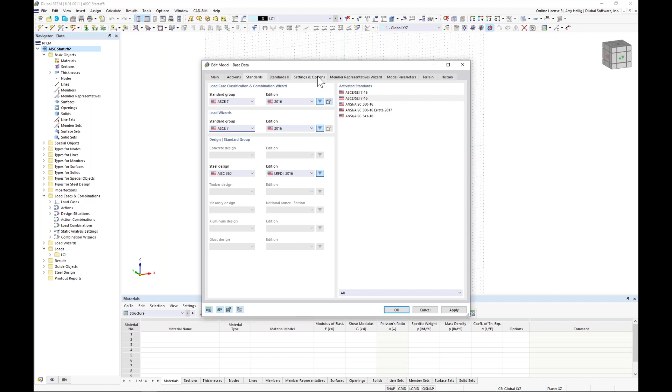Under the settings and options, this is where we can orient our global and local axes. Both are set to upward. I've also activated the member representative here, which gives us the ability to group together members with common materials, cross sections, and maybe member lengths. This will come into play a little later on.

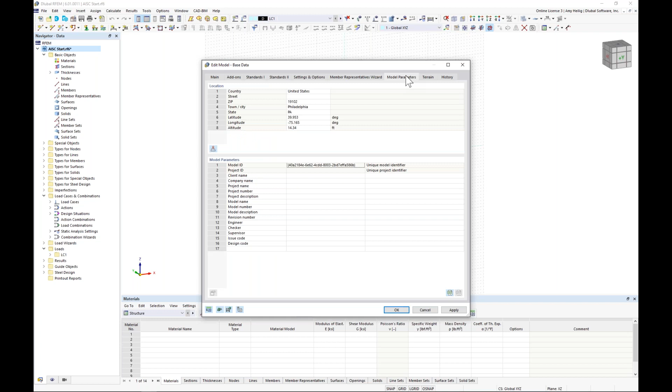Finally, we have this model parameters section, which gives us the ability to integrate with our GeoZone tool available on our website. For those not familiar with the GeoZone tool, we have integrated various standards, including the ASCE 7, the NBC standard, and many other international standards, for snow, wind, seismic, and tornado loads.

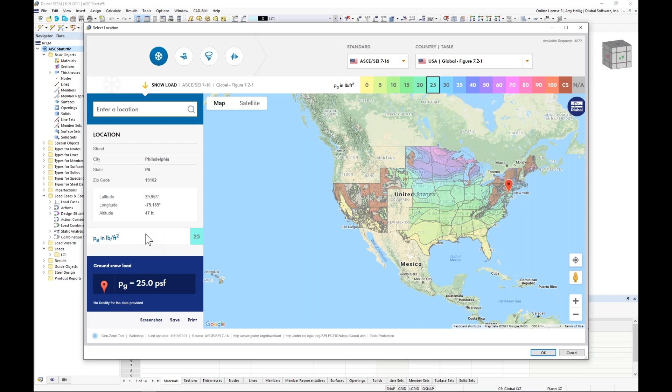This is further integrated with Google Maps technology, so we can simply type in our project address. I typed in Philadelphia, PA, and I have my ground snow load automatically given to me based on the maps provided within the ASCE 7. This will be used a bit later on for our automatic snow load generator.

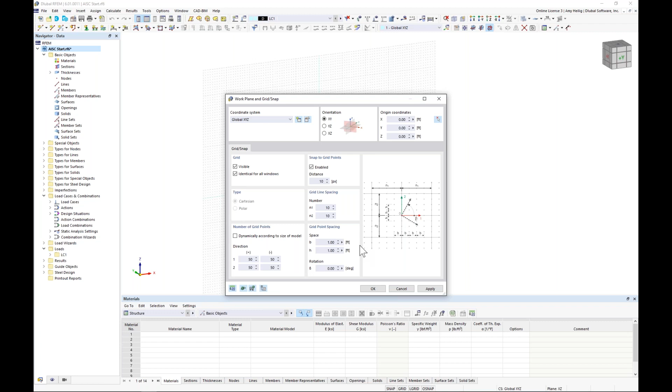Once we have set all of this input, we can click OK to be brought into our model. Within the graphical interface, I have my drawing grid activated. Down here at the bottom, I can right click to edit this drawing grid. The grid point spacing is set at every 1 foot. If we see anything other than this, we can always click here to set the default back to the 1 foot spacing.

We'll begin by drawing our first member. We'll go up to our toolbar to draw a new single member. The member type will be set to beam. The section will be defined here within my cross-section library, so I can activate my standard steel sections, and we'll use our filters on the left to filter to the United States, the AISC 15.

The W sections are now available to us here, where we can scroll down and choose a W14 by 48. Once I have my cross section selected, I need to create a new material.

In a similar manner, I'll open up my material database. I can again use my filters on the left to choose the United States, the AISC 360, and we'll see here steel A992 available to us that we can click OK.

Now this material is available for all members within the model. I don't need to redefine that material each time. I can just select it here within this drop-down box.

Once I click OK, I'm going to go back to this main tab and deactivate the design properties. This is specific to steel design according to the add-on we previously activated. We'll get back to this later on, but for now I want to deactivate this option.

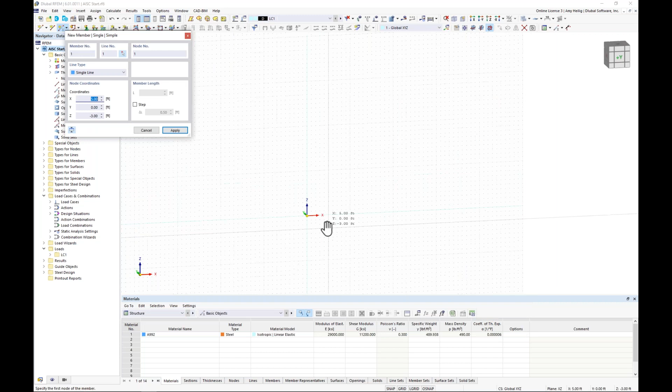We'll begin with our first column by snapping at the origin here and a point 14 feet in the global Z direction. My second point is going to be located at x equals 40 feet, and then we're going to choose again that same point of 14 feet in the Z direction.

Now I'd like to create a node that's right at the center of these two nodes at the tops of my columns. For this, we have a nice feature within our drop-down box that lets us create a node between two adjacent nodes.

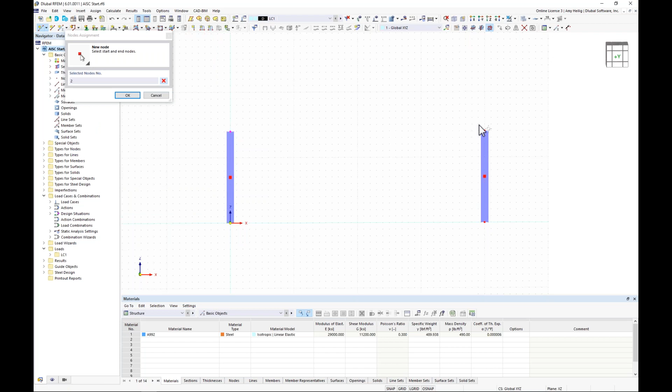What we can do is graphically select the nodes at the tops of my columns, and when I click apply, you'll notice we get a third node generated here. This node is really dependent on these two nodes that we've selected graphically.

I can even take this column and move it around and you'll notice that node moves with it. We can also take this node, double click on it, and you'll notice the node type is set between two nodes. If we want to edit it, we can simply change this back to standard and I can modify my Z coordinates to 16 feet in the vertical direction.

We're now ready to generate our beams for our first moment frame. I'm going to go to draw a new member once again and deactivate the design properties.

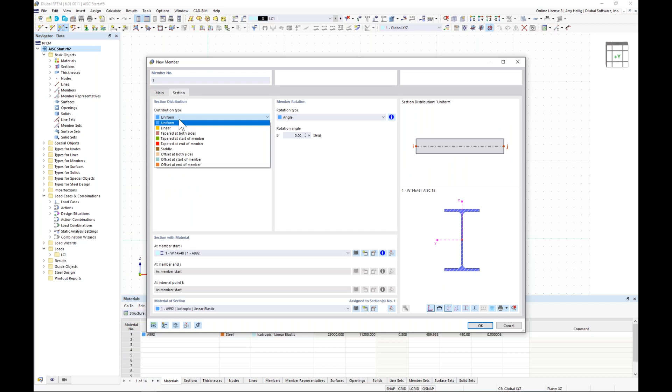Under the section, I'm going to choose, under distribution type, tapered at the start of the member. Previously in RFEM 5, if we had any type of taper, we had to completely create a new member segment. But in RFEM 6, we have the ability to integrate this taper directly within this single member element.

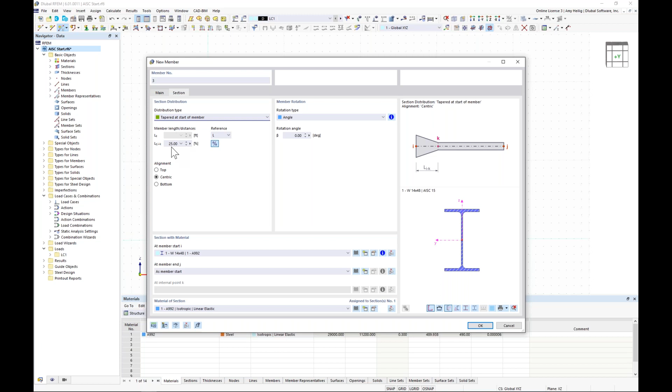We can set the member taper length, and this is set at 25% by default. We can additionally set the alignment. If I set this to top, notice that the top of member is completely flush here.

We do need to create a new cross section. For my member end, I'm going to go back to my W sections and scroll down here to a W12 by 26. Remember, I don't need to define the A992 material again—it's already available to me here, and I click OK.

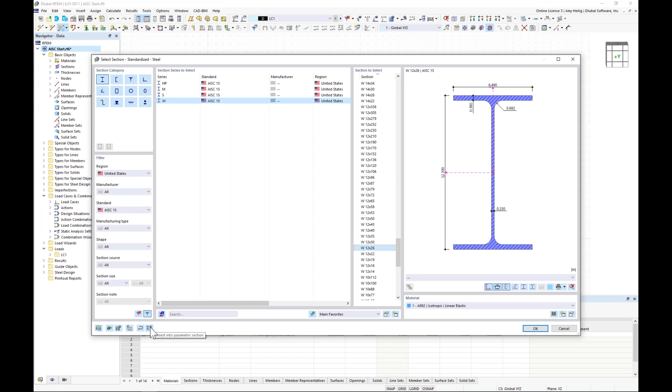I also need to create an additional cross section for my taper start. So I go back to my cross section library and choose again that same W12 by 26, but we have a feature over in the left corner where I can convert this into a parametric section. When I click this option, it imports all of the cross-section properties from that W12 by 26, but I have the ability to modify any of the properties, such as the depth to 24 inches.

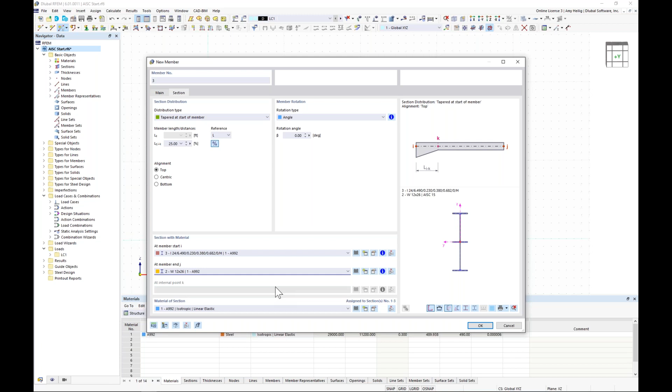I click OK, and once we click OK through this additional dialog box, we can set that parametric section as the member start. At the member end, I want to choose that W12 by 26 I previously defined. When I click OK, I will start at the top of my column, and my second point will be up to that center point. I do the same thing on the right-hand side, and now we can see those beams generated with the taper available to us here.

These color codings are the member representatives. I'm going to turn those off for now—we'll get into them a little bit later. I'm going to highlight all of my member elements here.

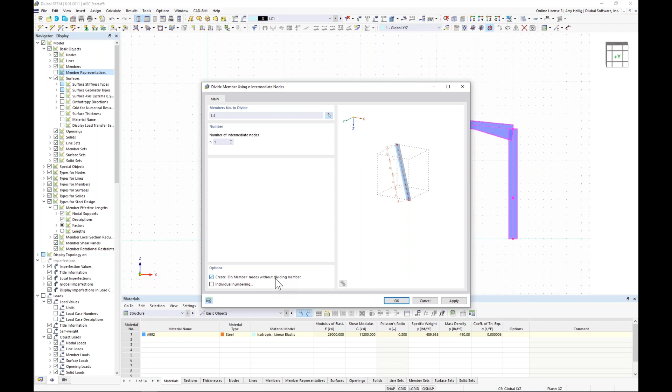I'll right click, and under the members option, I have the ability to divide the member by a set number of intermediate nodes. I'm going to create one intermediate node, and choose the option to create the node along the member without actually dividing it, so that node will be integrated as part of the member element itself.

I click OK, and if we turn this into wireframe view, we can see these nodes in a different color, blue here, generated at the midpoint of each element. I'm going to highlight all of my elements here, including those new nodes, but hold down my shift key to deselect the nodes that define where the taper start should begin.

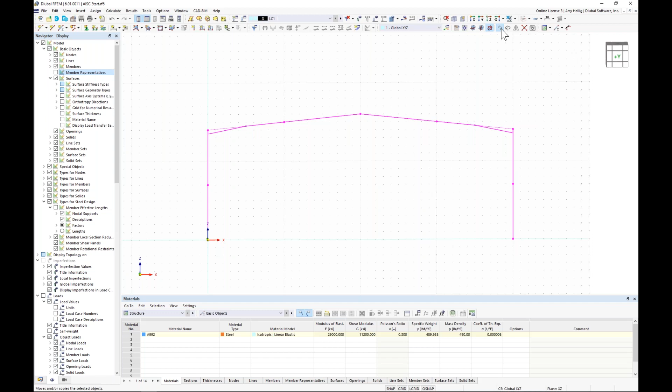I'm going to utilize my move copy tool and create a copy. We'll create 3 total copies in the global Y direction of 16 feet. Under the numbering and options, we have the ability to turn on the step links, and when we do this, we get a new tab that allows me to create members between copied nodes. So this is just a little bit of a time saver here.

Now, if I don't have the available cross-section I'd like to use, I can simply create a new one. This brings us into our familiar dialog box for creating a new member element. Turning off the design properties, the member type here is going to be truss, and a truss applies that moment release at either end of the element. So internally, you can see this hinges option is now grayed out.

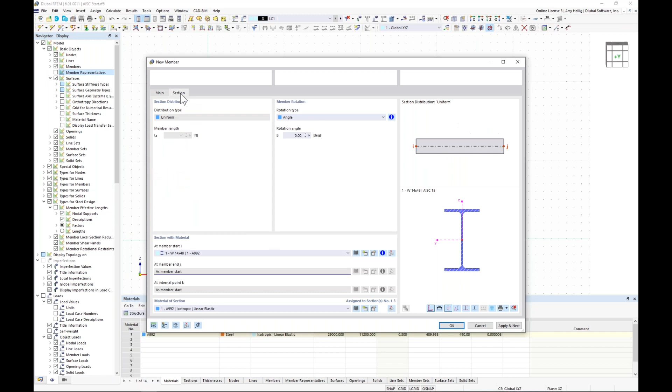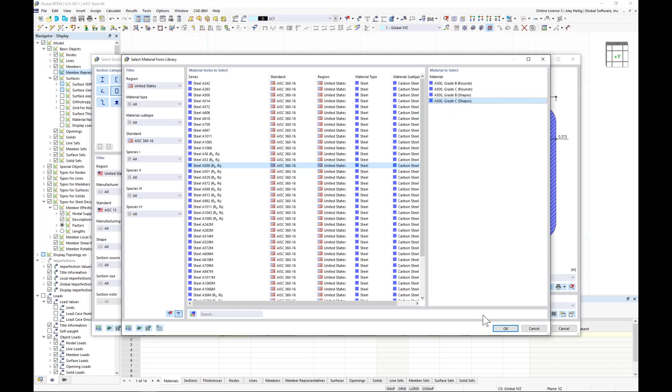Under the section, we create a new cross section, and we go into our cross section library, but this time we'll choose an HSS. We choose the square HSS, and scroll down to 6 by 6 by 0.375. Now I do need to create a new material, so I access my material database and choose steel A500, selecting A500 grade C for shapes on the right-hand side. I click OK through these dialog boxes.

And remember, we're still in this move copy tool, so once I click OK, what I should see here are those HSS elements generated between those copy nodes.

Now, one thing I want to do down at the bottom is hold down my control key to select all of these bottom HSS elements. I'm going to double click and change the member type here to coupling hinge. This is actually some type of rigid element, the stiffness is very high. We don't need to specify a cross section or a material; all of that's handled internally with a very high stiffness, and a hinge will simply release the moment at either end.

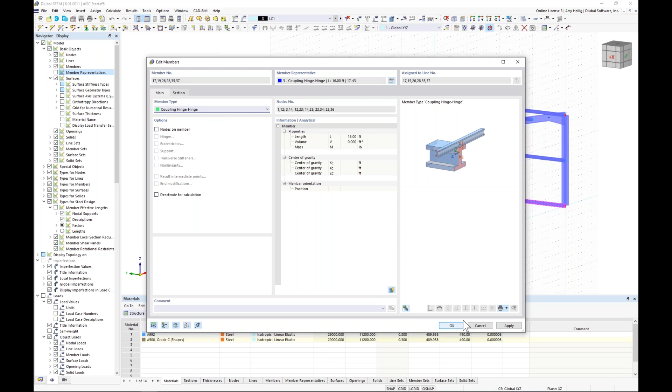The reason why I'm doing this is we will be defining surfaces for the facade walls for the entire structure, and I want all of the loads at the lower part of the structure to be transferred back to the bottom of my columns and into those foundations. We'll see that once we generate those surfaces.

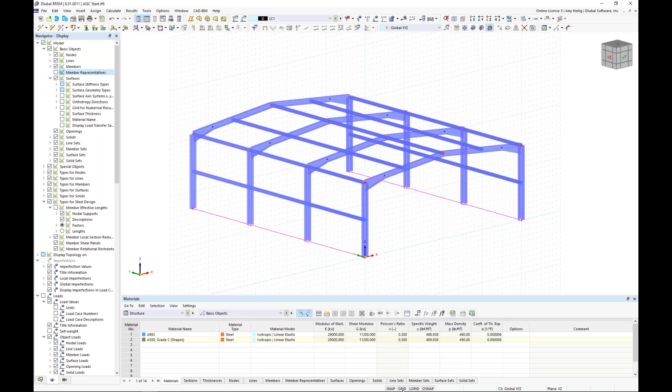So I'm going to continue on here to draw my X bracing now. I will go ahead and draw a new member once again. The member type now is going to be tension only, which again applies that member hinge at either end. Additionally, if there's any compression within this element, it will be completely removed from the calculation, so it can only take tension forces.

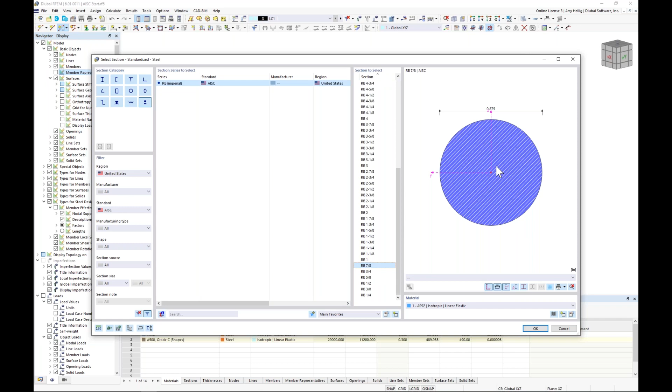We'll turn off the design properties, and under the section tab, we create a new cross section. I could either choose that under my parametric bars for my X bracing, or additionally we have bar sections here according to the AISC, same concept. This allows me to choose a 7/8 inch diameter round bar. Creating one more material type, I want to select A36 for this element.

Once I click OK through these dialog boxes, I can go ahead and turn this into wireframe view, and I can snap from one corner point to the other. You can see I slightly missed that one, but no problem, I'll fix that in just a minute. And then we can do the same thing up here at the top of the structure.

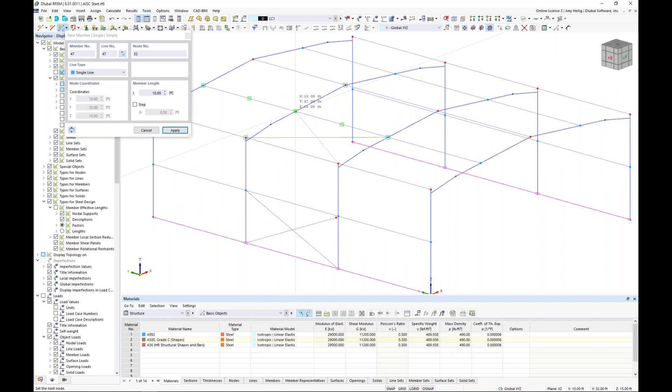Fixing this point up here is really just as easy as dragging and dropping, and that will snap to that point. Now selecting this lower X brace, I can hold down my control key to drag and drop and make a copy here as well. Now we can do the same thing at the top.

Additionally, I can select all of my braces here by holding down my control key on the left side and take advantage of my mirror tool. The mirror tool is similar to something we'd see in AutoCAD, where we can create a copy. We'd like to mirror about the YZ plane, and I'll choose my mirroring point, which will just be right here at the center of the structure. I click OK, and now we can see that X brace generated on the other side.

It looks like one was additionally forgotten here, but no problem—we'll go ahead and drag and drop that down to the bottom element there. So now that our X bracing is complete, I'd like to finish the front and rear of this structure with some additional columns and wall girts.

So we'll go ahead and turn back on our drawing grid, and I'm going to snap the drawing grid origin to a new location. I can do so with this option up here in my toolbar, and I choose this point where my HSS intersects this tapered girder here at the end.

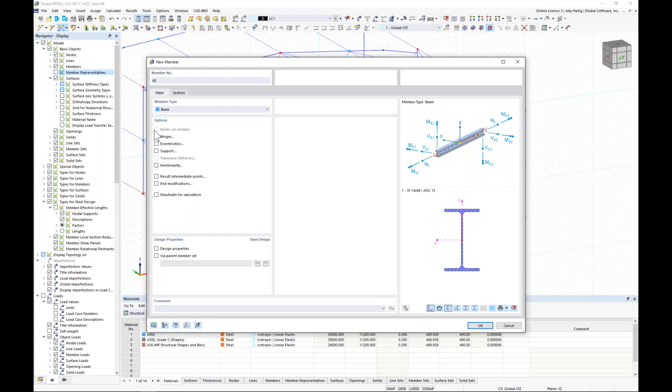My additional column will require me to generate a new cross section for the last time. We'll go ahead and turn off the design properties, and I'm going to turn on my hinges here. Under the section, I'll go back to my cross section library, and we're going to choose a smaller section, a W8 by 31. A992 material is good.

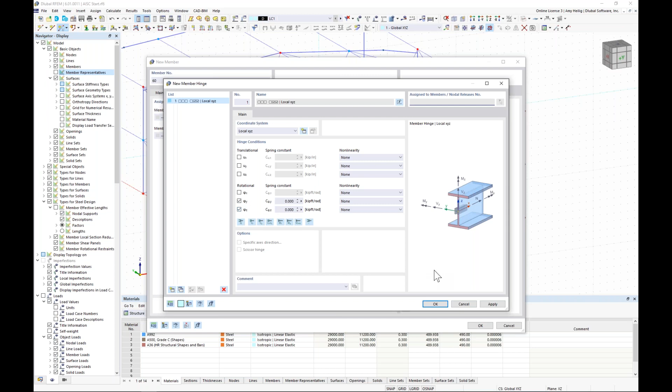I click OK. Now, under the hinges tab that we've activated, everything for a beam element is considered fully fixed. So if we'd like to apply a moment release, we need to create a new member hinge at the member end. I go in here to create a new member hinge type—we can see our 6 degrees of freedom. The program automatically assumes we'd probably like to release the moment about the local Y and local Z axes, so I can go ahead and go with that suggestion. Now this member hinge definition type is always available for any future members within this model—I do not need to redefine it, but rather just select it from my drop-down box.

Once we're done here, I can click OK, and I'll snap from the bottom of the structure up to the top—so this is my front-facing column here. I'm going to take these two elements, hold down my control key, drag and drop to make a copy. Now, of course, we want to snap these members to this column that I just created.

What we can also take advantage of is our object snap settings. Down here in the lower right corner, if we right click, we see a lot of options, again similar to what we'd see in AutoCAD, including the perpendicular. This allows me to take this node here, and the program will automatically detect the perpendicular point and allow me to snap exactly to that element here.

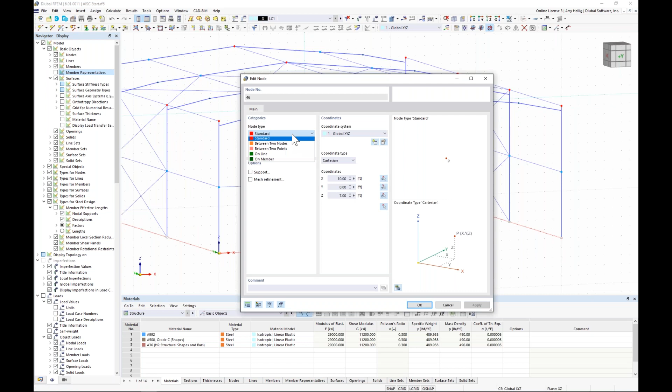Now for the bottom girt element, it's really just as easy as snapping to that bottom node. But we have one small problem here—this node is really not detected along this member length. So we can simply fix this by double clicking on the node and changing the node type to on member.

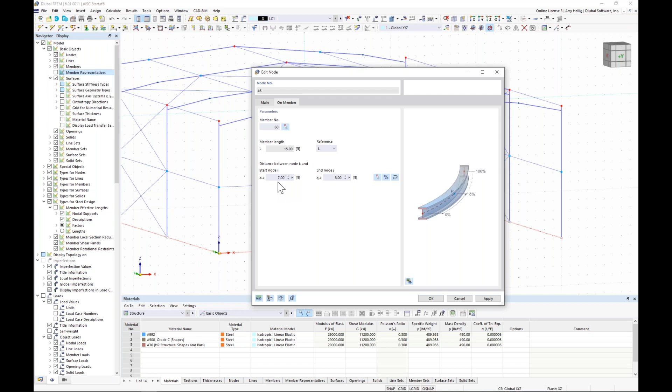On the second tab, the program tells me, okay, we'll go ahead and choose the member it is associated with, so we'll choose graphically member number 60. Then I want to tell the program graphically as well where this node along the member should reside—we can see here that is set at 7 feet. I click OK, and now that node has changed color to blue.

I can take all of these elements and make additional copies here for the front of the structure, and I'll go ahead and take these two final elements, holding down my control key to make my last copy. Now up here, we do need to connect this column up to the node, so we just drag and drop and everything is complete at the front of our structure. Now I'm going to highlight all of these elements here, including the nodes and the rigid elements down at the bottom.

I hold down my Control key and drag and drop to make a copy at the rear of the structure.

Most of our member modeling is complete, but now I'd like to consider our facade walls. I'm not interested in modeling these with a set material and thickness and designing them. I'd rather use them to transfer loads back to my members.

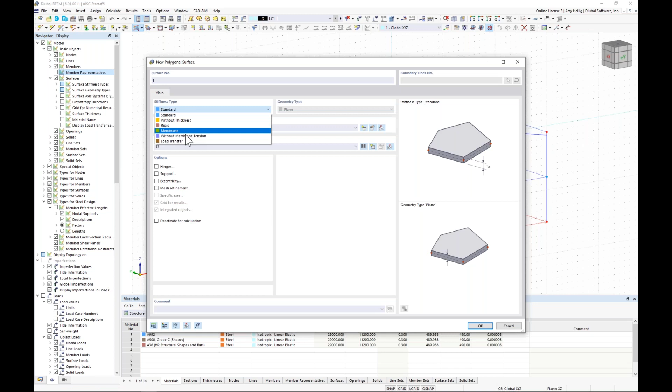We have a new feature within RFEM 6: using the drop-down box to draw a new surface, I can choose a polygon and set the stiffness type to load transfer. Notice I won't be able to select a material or thickness, since it's only used for load distribution.

Under the second tab, I can select whether this is one-way or two-way area load distribution based on the local axes of the surface. We'll go ahead and select one-way area load distribution in the local X direction, and additionally I can set a surface weight for these facade walls.

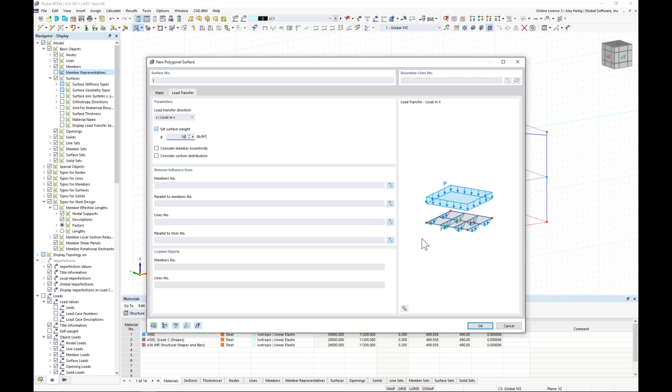If I want the self-weight to be considered within this model and the static analysis, I can go ahead and set 10 pounds per square foot for this new surface type.

I want to snap to the coordinate points of my surface for my front wall, and I'll turn off my drawing grid down at the bottom to make this a little easier. Currently in a rendered or wireframe view it's difficult to see these surfaces - only a dotted line is created. Every time I close the surface with that final point, I just double click.

We'll go ahead and generate the surface at the left side of the roof here, and then we have one more surface to generate here at the back.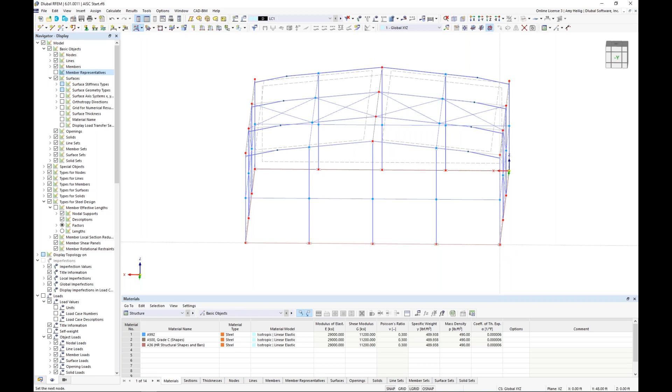Once we are complete with this, just to give you a better sense of what's going on, we can turn this into a rendered view. Here are all of these surface elements, again with no stiffness, just being used for load distribution.

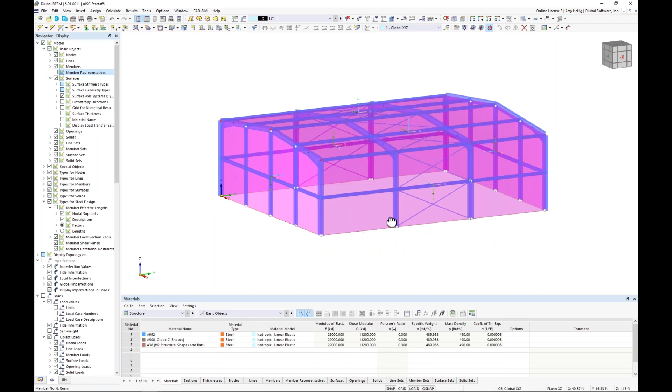I also like to right click and turn on the local axis system of the surfaces, because I'm choosing a one-way area load distribution. I wanted to ensure all my local X axes are in the horizontal direction, and they are. So we can right click and turn off those local axis systems.

The final thing to do is to support the structure. We go up here to a new nodal support, and within this option we have several defaults, such as pinned, a fully rigid support, some roller supports, or we can always create our own.

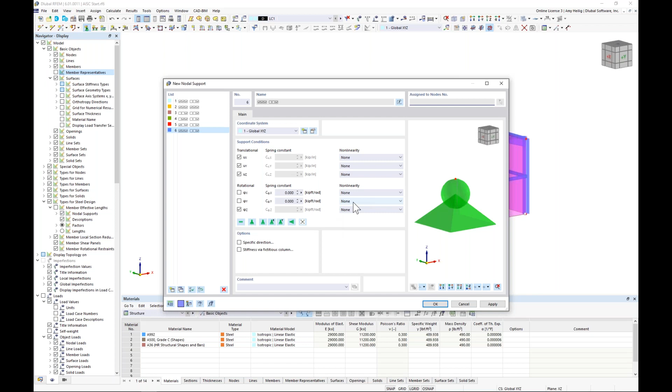When we create our own, we have 6 degrees of freedom, 3 in rotation, 3 in translation. We can set partial fixity here with spring constants or non-linearities. Say we want it to fail in uplift - this is possible, as is sliding and friction. We can define those with those non-linear options.

For today, I just want to choose the default pin option here, and I click OK. This allows me to highlight over the bottom of all of my elements to apply that nodal support at the base of each column.

I can also right click on these supports, and you'll notice we have a nice slider here where we can decrease and increase the size.

Once those supports are generated, our modeling is really complete, so I want to move into the definition of the load cases themselves.

We go up here to edit our load cases, and notice we already have a default load case set. I'd like to give it a load case name of dead load, and self-weight is automatically turned on, so the self-weight of our members - remember we set that self weight for our facade walls, for the load transfer surfaces. The action category here is set according to ASCE 7, so the program knows which load factors to apply to each load case.

We leave this one as dead load. We create our second load case, snow load, with the action category of snow - notice self-weight is turned off here. And we create our final load case, wind in the positive X direction, with the action category set to wind.

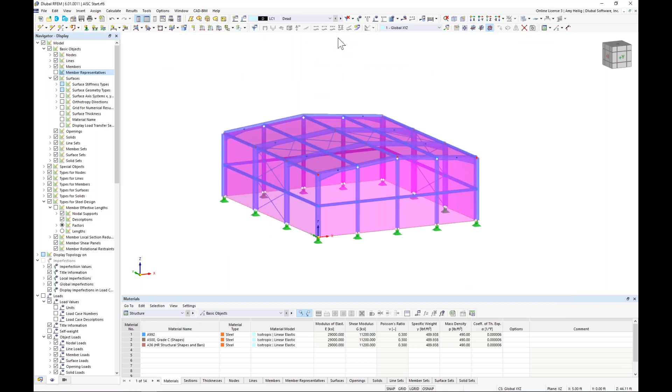We've generated these 3 load cases here within our dropdown, but we actually need to apply the loads to the structure. For my dead load, I don't want to apply any additional loads other than self-weight, except for pre-stress of these X-brace members.

So how I can do this is to go into my project navigator, and we have a nice feature within the views tab that allows me to select members by type graphically, and I can choose my tension-only members. Notice everything else is grayed out, and this gives me the ability to select all elements here, which will be only my X-braces.

We can begin by drawing our first load within the structure. I'll go up here to draw a new member load. The load type is going to be axial displacement for that pre-stress, and the load magnitude will be negative 0.01 inches in the local X direction. When I click OK, that load is automatically applied to all of these tension-only members, and we can see that graphically shown to us here.

Once we're done with the dead load case, we want to move on to snow load. I previously mentioned that we do have our snow load generator available to us according to the ASCE 7.

This can be seen under the load wizards tree within our project navigator. We'll see here snow loads, which I can double click to create the snow load generation. Now, the roof type can be flat, monopitch, or duopitch.

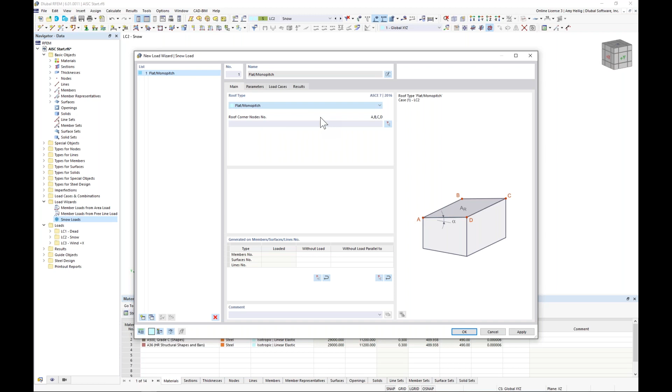Anything outside of this basic rectangular shape, these snow and wind load generators cannot be used, so you will have to manually apply those loads instead. But for today, our structure does fall within this geometry.

So what we can do is select the roof geometry graphically here. I go around and pick each of these 6 points. I double click for my last point, and now the roof geometry is recognized here within this dialog box.

Under the Parameters tab, remember we have already set the project location according to the GeoZone tool back when we first created the model. So the address is shown here, but we're also bringing in that ground snow load directly from those ASCE 7 maps, so nothing to do further here.

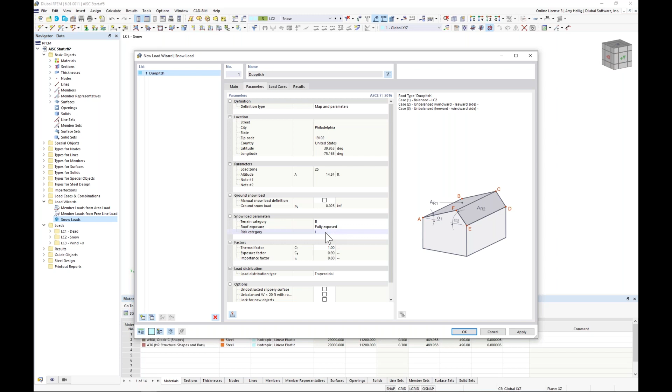Now I may want to make some adjustments according to the terrain category, the roof exposure, or the risk category, because as we know, this is going to affect the magnitude of my snow loads. We'll just go with the default options for today.

Under the third tab, we have the ability here to generate the balanced snow load cases, but also unbalanced. For our simple example today, we'll just create the balanced snow load. The program is intelligent enough to go ahead and place this under load case 2 for snow load.

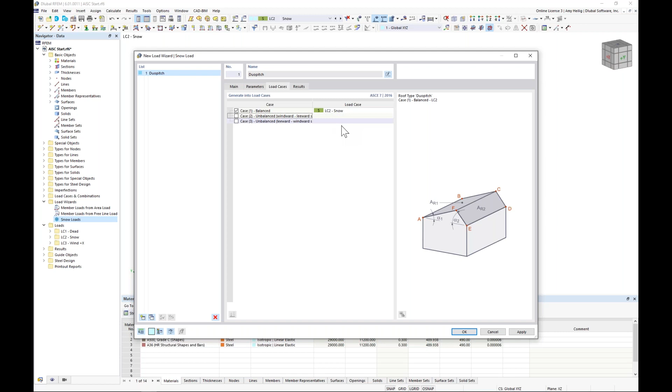So when we click OK, what we should see now is a new generated load at the top of our structure. We can right click to display this load separately, and under my project navigator within the display tab, up at the very top here, I have my basic objects for surfaces, and here is where I can turn on the display of the load transfer separately.

So the surface load is being applied to those surfaces. When I turn on this feature, the program's showing me, based on the tributary area, how exactly that load is going to be distributed to each of these moment frames. And by the way, we can also go back to the dead load to see the same concept for that self-weight of 10 pounds per square foot that we applied to all those surfaces as well.

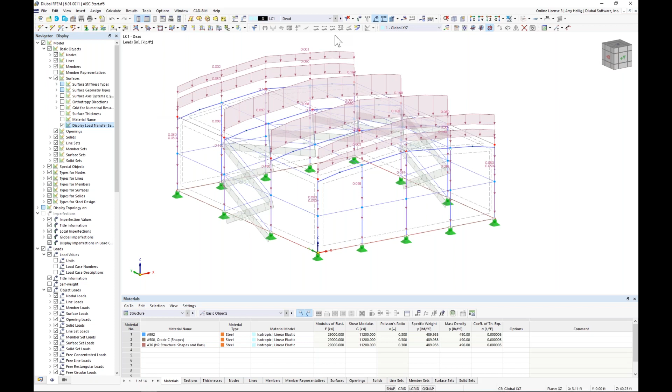So now we are complete with our simple snow load case. We'll move on to the wind load. As mentioned, the wind load is still in development according to the ASCE 7, so it's really as easy as applying some simple surface loads here to represent that wind in the global X direction.

We'll start off with a new surface load up here in my toolbar, and we want to set the load magnitude as 0.015 kips per square foot in the global X direction. We can see my global axes down here in the lower left.

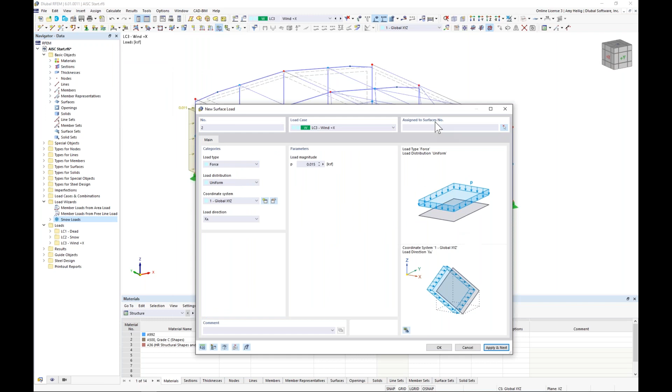Now I want to assign this to my first surface over on the left, surface number 4. If I hit apply and next, notice I'm still within this dialog box, but that load has been applied in the background.

This gives me the ability to modify my magnitude for a small section force, which I'll apply at the rear facing wall here. I click apply and next, and we should see that load generated in the background.

I further adjust my magnitude to negative 0.008 kips per square foot, this time in the global Y direction, and choose this front-facing surface for an interior section load as well. I hit apply and next. We just remove this negative sign for my surface in the back, click OK, apply and next.

Now the final load is going to be the same magnitude, but this time we want to change the coordinate system to the local X, Y, and Z axes. This will be applied based on the local axes of my roof surfaces. Since they are at an inclination, I want this wind load to be normal to those faces, so we set this according to the local Z axis for these surfaces, and then I can graphically select the 2 roof elements here. I click OK, and now we're finally done with our wind in the X direction.

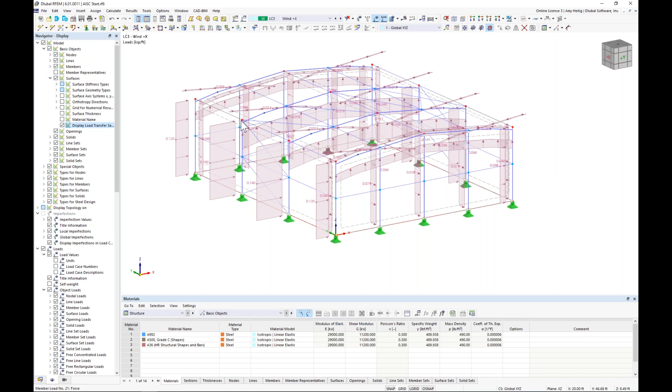Now again, we can go back to displaying the load transfer separately here. This is just based on the tributary area of all of our elements, since those are surface loads applied to the surface load transfer elements.

Now that we are done with wind in the X direction, I'm going to go back to my project navigator, and I can view my load cases within my additional tree settings here. So I expand out the load cases and I see dead load, snow load, and wind in the X.

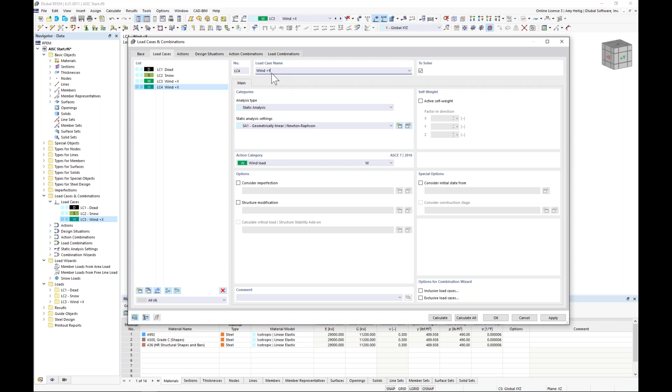I can right click on wind in the X and choose this quick option here to copy the load case. Immediately my dialog box opens up, which we've seen before, and I can just change this to wind in the Y direction. The benefit of this is that wind in the Y direction has also copied all of those same surface loads, so I don't need to redefine those.

All I need to do here is adjust the magnitude. Now I could adjust the magnitude by clicking on each one of these surface loads, or we can also take a look at our load input data directly within our table options down here at the bottom. So I use my drop-down box to select loads, and I'll find surface loads down at the bottom.

Under wind in the positive Y direction, I just want to make some small changes here to my magnitude: negative 0.008 for my left facing surface, and we'll go ahead and change this to positive 0.008 for the right. Now this front facing surface is where a majority of my wind load magnitude comes from, so we set this to 0.015 in the global Y, and then we're going to go ahead and modify the rear surface to 0.006.

Nothing to do further with my roof elements, those we can leave as is. So essentially all of our loading is now complete for our 4 different load cases that we have available in our drop-down box here. So now the next topic to discuss, we'll jump back to the PowerPoint here to turn back to the AISC 360 Chapter C, Design for Stability.

Within this chapter, section C1, there are 5 requirements listed. The first is flexural, shear, and axial member deformation. The second is that second order effects, including big P delta and little p delta, must also be accounted for when we're designing for stability. Geometric imperfections should be included, as well as stiffness reduction due to inelasticity, and finally, uncertainty in stiffness and strength.

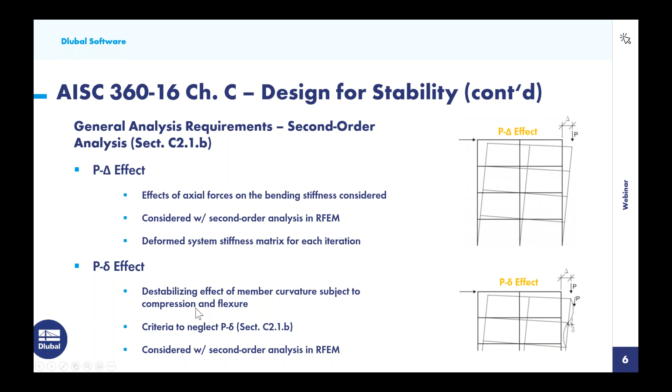I'll show you in a minute how we can apply those settings, but let's continue on with item number 3, the consideration of initial system imperfections according to section C2.2. When we're talking about buildings, this is primarily column out-of-plumbness. When we're talking about member out-of-straightness, this really doesn't need to be addressed within chapter C for instabilities, because it's really considered within chapter E when we're designing our members for compression.

There are two approaches for considering imperfections. The first is direct modeling according to section C2.2a. The code tells us that we can actually physically model these initial displacements due to loading and anticipated buckling mode shapes. The magnitudes are going to be based on tolerances set forth within the code of standard practice, or on the known imperfection itself. So if we wanted to really alter the geometry of our model to take into account those initial displacements, that is one way to account for the imperfections.

Now probably the alternative, and maybe easier, approach is the use of notional loads, given to us in section C2.2b. The equation directly from the standard is listed here as 0.002 alpha times Yi. Alpha just depends on if we are going ahead with LRFD or ASD limit state design. Yi is going to be the factored gravity load at that particular level. From this equation, we're going to calculate the notional loads that should be applied at each level.

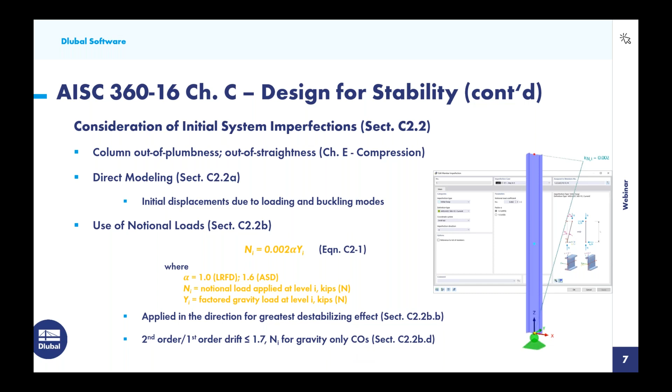Now, the final topic here is item number 4, adjustments to stiffness in section C2.3 to account for inelasticity. The first requirement is to apply a 0.8 factor for axial and flexural stiffness. This should be applied to all members that contribute to the stability of the structure, but the code goes on to say, well, in order to avoid artificial distortion, just go ahead and apply this factor to all members.

Tau sub b is dependent upon the required factored axial compressive strength, or what is the demand normal or axial force within the member from the analysis, but also what is the cross-section compressive strength, or what is the capacity of the member. Depending on what this ratio is, if it's less than or equal to 0.5, then it's easy enough to set tau sub b equal to 1.

Now, when this ratio is greater than 0.5, we have an equation that we need to follow here to correctly calculate tau sub b. And furthermore, what's new within the 2016 is that we do need to account for both non-slender and slender elements. This does affect which area we'll use here, whether it's the gross area or the effective area.

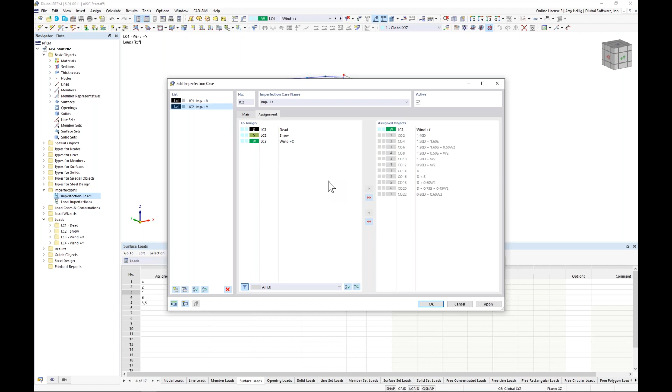So now that we have generated these imperfection load cases, we actually need to apply the imperfection to the structure. So we can do this by go ahead and clicking OK here. And before I do, I'm going to take advantage here again of my visibility options to filter the members by cross section.

And I'm going to choose my vertical elements here in the vertical direction. So you can see my W14 by 48 and W8 by 31. Now I can also right click to turn on the local axis system of the elements because this is important for my imperfections.

So under my imperfections tree here, we can now see that we have imperfections in the X and we have imperfections in the Y. So under imperfections in the X, I'm going to right click to create a new member imperfection. And under the definition type, sure enough, we have available here the AISC 360-2016 standard.

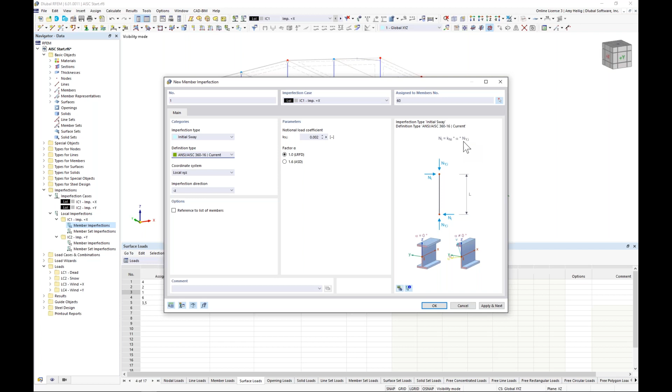And we're going to see that exact equation that I showed in the PowerPoint given here of 0.002 times alpha times yi. Now we want to apply these imperfections in the global X direction, which relates to the negative local Z axes of all of my members shown here.

So then I can graphically select, let me pull down this table. I can graphically select here all of my vertical members. I click OK, and now we can see all of those populated here. I can click apply and next.

Now I can choose under my drop down here imperfections in the Y, and all I need to do is to change the imperfection to the positive local Y axis. Again, that's going to correspond with the wind in the global positive Y direction. I'm going to graphically select all of my vertical elements here once again. I click OK, and I can click OK once again.

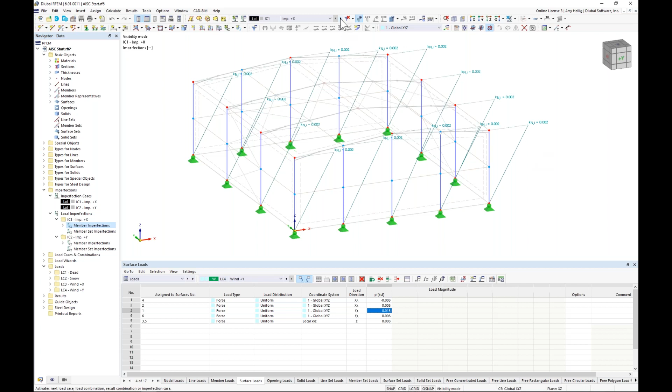Now, what we can see when I turn off my local axes is our imperfection cases available in our drop-down box now, and we can graphically see these by turning on the imperfections up here in the toolbar. And here is our column out of plumbness, or our notional loads applied in the X direction, as well as applied in the Y direction.

So once those imperfections are applied, I just want to go in a little bit more detail about how the imperfections should be really applied to each load combination, because this can be a little bit complicated.

So let us jump down to, let's say, our dead load here, and we can go into our load cases and combinations, which we've been here before. But under the design situations, the program is automatically generating two design situations according to the ASCE 7.

We have here our LRFD design situation, which is going to be our factored load combinations, and ASD, which is going to be our unfactored load combinations. Now, within the LRFD design situation, you can see here it's active for steel design. So I'll be using this for the steel design add-on according to the AISC in just a minute.

We have these options down here specific to each design situation, so I'm going to go into the edit detail settings. It's important to know that all of the direct analysis method settings that we talked about in the PowerPoint are all controlled within this dialog box. So that's kind of nice that we don't need to jump around to all different areas of the program, but we're going to set everything here.

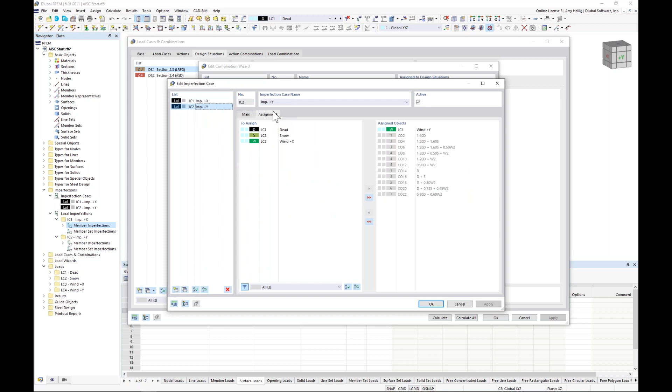The first is to turn on the imperfection cases for my factored load combinations. You can see that's automatically checked on by default. If I go into this edit button, this just brings me back to the imperfection cases that I've already seen before. So imperfections or notional loads are now taken care of.

Let's move on to a second order analysis accounting for big P delta and little p delta. Well, that's really just as easy as using this drop down box here. We see here linear analysis, but we want to set this according to second order P delta. So now big P delta and little p delta will automatically be accounted for all of my factored load combinations.

Now, the final topic is our stiffness modifications, and we can activate this here with the structure modification. Now, I do want to create a new option here, and I'm going to activate the modify stiffness for my members. I now get a new tab, and under the member modification, I use my drop-down box here to select new member stiffness modification. Well, within this drop-down box, we have the AISC 360, the 2016 available to us.

And we're going to see here tau sub B. When we have this set to iterative, it's going to take into consideration all of the equations for calculating the tau sub B stiffness reduction into consideration. Now, alternatively, we can set this equal to 1.0 if maybe we're applying additional notional loads instead. Now, we also have our bending stiffness multiplication factor here of 0.8, as well as the axial stiffness of 0.8.

So once we have defined this here within our stiffness modification definition type, we need to graphically select the members that this should be applied to. Remember, the standard tells us to go ahead and apply this to all members within our model, but notice I'm not applying it to the rigid elements down at the bottom. Those are not applicable there. So now I have created this stiffness modification here. It is turned on for my factored load combinations, and all of my direct analysis method settings are now considered.

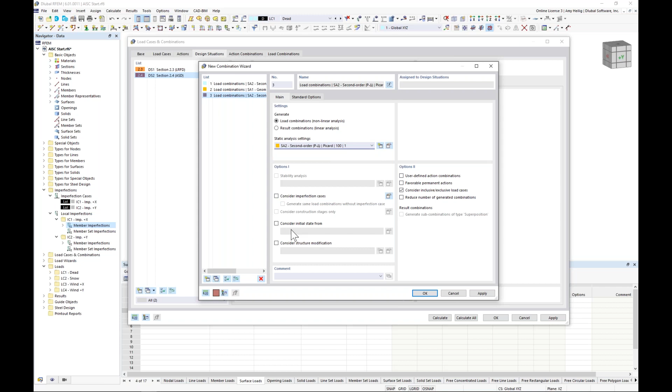Well, I can simply create a new option here. So we'll choose the new combination wizard option number 3. I'm going to select a second order analysis, but notice for this one I'm going to leave off the imperfections and the stiffness modifications. So within the LRFD, we're still referencing item number 1 here with those options set, but for my unfactored load combinations, we shouldn't see any of the stiffness modifications or notional loads applied.

Now we can confirm this under the load combinations tab. Here are all my factored load combinations, which we can see have imperfections and stiffness modifications applied. But if we jump down to the unfactored load combinations, everything's turned off. So now everything is set up accordingly.

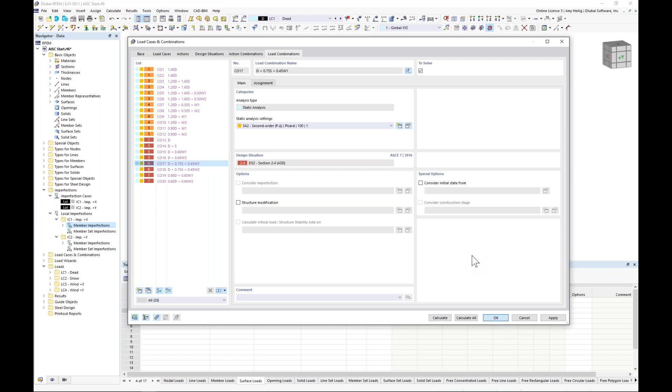Okay, so realistically, everything is ready for the full analysis calculation. But within RFEM 6, the huge advantage is that we now have integrated these design add-ons directly within the main program, so that we can do both the analysis and the design at the same time. So let us switch gears now to talk about the design input for the Steel Design add-on that we activated at the very beginning of the presentation.

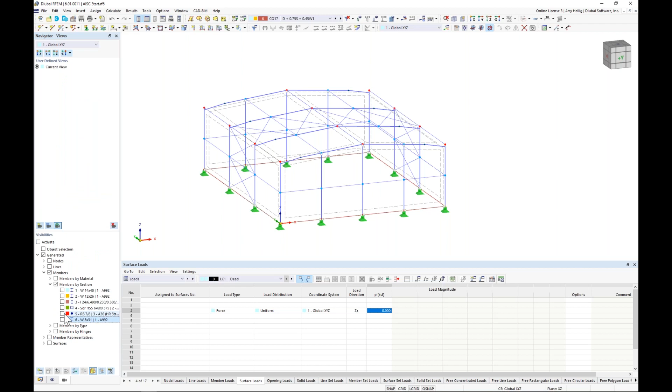So I really don't want to design all of my members. Now, realistically, of course, we'd probably want to, but for presentation purposes, I'm going to use my visibility options here to only select those tapered elements up here along my main rafters for my moment frame. So I'm only going to design these elements.

Now, additionally, I'm going to turn back on my member representatives. Remember, member representatives can group together similar elements that maybe have the same cross-section, length, and material, so the program recognizes that all these are similar. The problem is, I'd really like to create a new member representative for my 4 exterior elements here.

So what I can do to divvy these up into a different member representative is just as easy as adding a comment down here for each one of these elements. Under the comment, I can type in 'end moment frame', for example. So when I click OK, and I'll go back to my visibility, we should see a new member representative shown here in blue color. So now we have 2 different groups here just by setting a simple comment.

So let us begin with the design input. I'll start off by selecting the member representatives on the exterior here, and I can double click on that colored box. Notice that members 3, 4, 15, and 16 are part of this grouped member representative.

Well, if I go into the edit settings here for these individual members, remember we had turned off design properties for all of those elements. I'm going to go ahead and turn those back on. And instead of setting my input for each individual member, I'm going to go back into my member representatives and set that input here so that it applies for all of these members at once.

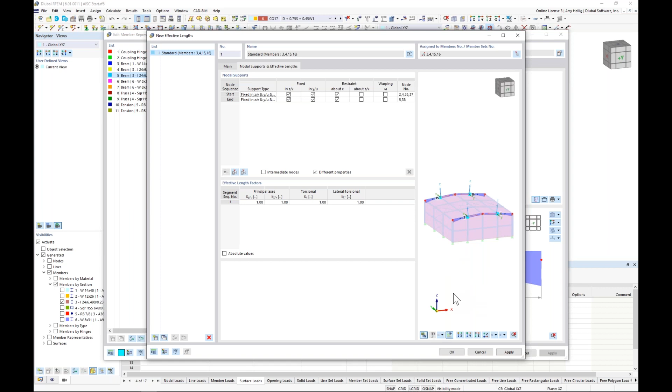The reason why I select them is so that my picture down here will update. I like to see exactly where I'm at within this dialog box when I'm setting these intermediate supports. So I'm going to activate the intermediate nodes, and I want the program to automatically detect where the nodes exist along the length of the member. Notice I now have a couple additional rows here.

The program automatically sets by default the member start and member end intermediate supports. Our second node here is really irrelevant - that just defines where the taper start and end should occur. But the third node, if we rotate this around and zoom in, I'd really like to brace this element in the weak axis direction, the local y-axis direction.

We also have this column framing up, so I'm going to assume as well that the element is braced in the vertical direction. Additionally, I'm going to assume that the member does not have the ability to rotate about its own x-axis, or torsion, so I'll go ahead and brace that there.

Now my effective length factors are all set in my table down here. We know that if we're designing according to the direct analysis method, all of our K factors can be set to 1.0. So now that I have set these intermediate restraints, I can click OK, and I'll see these automatically updated here for my members.

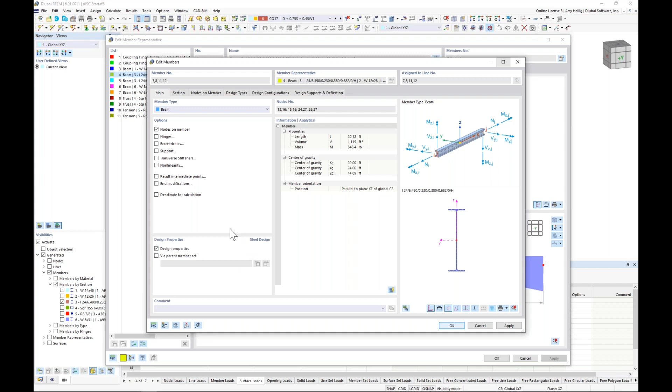Now I'm going to do the same thing for my interior members, but we have slightly different provisions. The first thing to do is go into my details settings, and we need to turn back on the design properties. I'll click OK to make these settings for all 4 members at once. Under the design types, I want to choose an effective length here. We'll go ahead and choose the eigenvalue method.

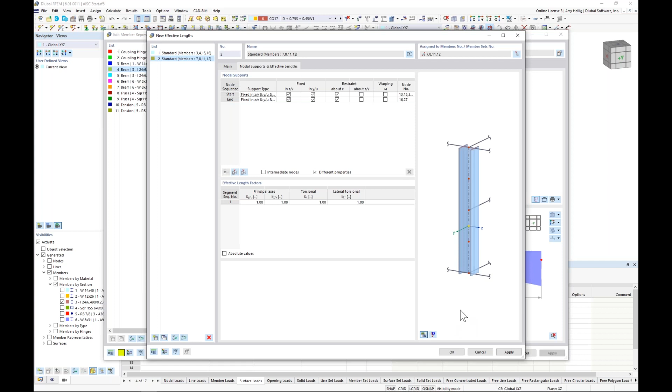Under the second tab, remember, I like to graphically select these - not necessary, but I think it's helpful in determining where you're at along the length of the member. So we're going to have the program automatically detect the intermediate nodes. Two additional rows are given to us here.

Now this is slightly different. The first node, we can leave as default. The third node, I would like to only set the intermediate support in the weak axis direction, or the local Y direction. We don't have any additional columns framing up, so I really can't say that the member is braced in any other degree of freedom there.

Same concept for this middle node. I actually need to go back and adjust what the program automatically assumed, to brace this only in the weak axis direction. We don't have additional columns framing up there as well.

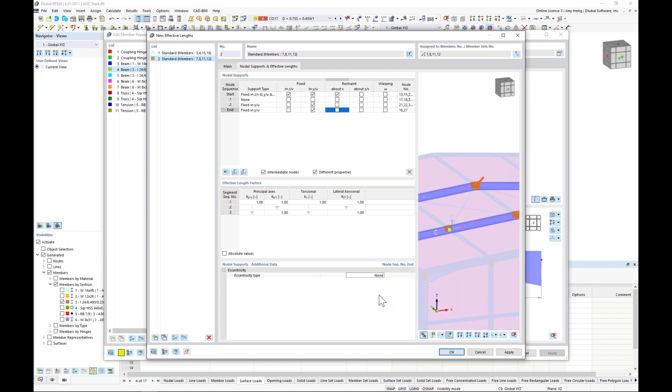Now additionally, for these weak axis intermediate supports, if you want to brace them at only the upper flange or only the lower flange, you can set that eccentricity down here. Otherwise, it's going to assume that both the upper and lower flange is completely braced. So when I click OK, we're now going to see those intermediate supports set here.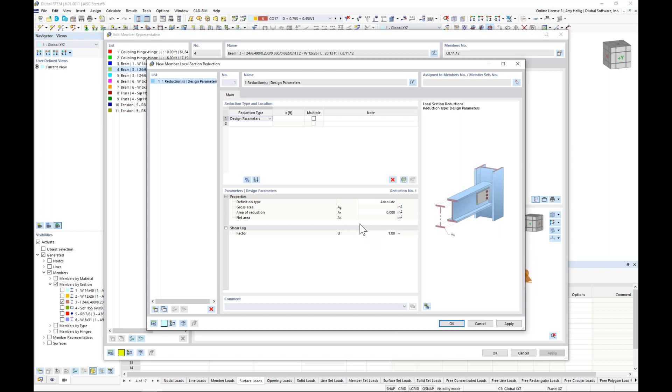Now to quickly cover some of these other settings - local section reductions. If we wanted to create a new reduction type here, you'll notice that if our cross-section area is really reduced, we can go ahead and put that in here for the net area.

The shear panel and rotational restraint - these are specific only to the eigenvalue analysis approach, and this is for lateral torsional buckling. So if we had a continuous support for the member in the weak axis direction, we might place a shear panel on it. If we had a continuous support for the member not to rotate about its own axes, again that kind of torsion, we could set a rotational restraint.

And within these options, you can see that we can apply some different settings to ultimately calculate a spring stiffness for the eigenvalue analysis. So this may be something that you really don't get into too much.

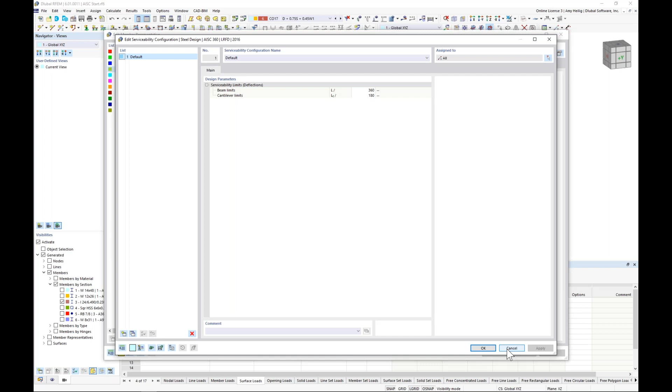The design configurations - we have here listed strength and serviceability, and this is specific to the AISC. We can see under strength, just some different provisions, not really too much going on here, so we can leave everything set as default. But under serviceability, this is where we would set our limiting deflection ratio - L over 360 for simply supported, L over 180 for cantilevers. We can make adjustments directly within this dialog box if we wanted to adjust the serviceability configuration.

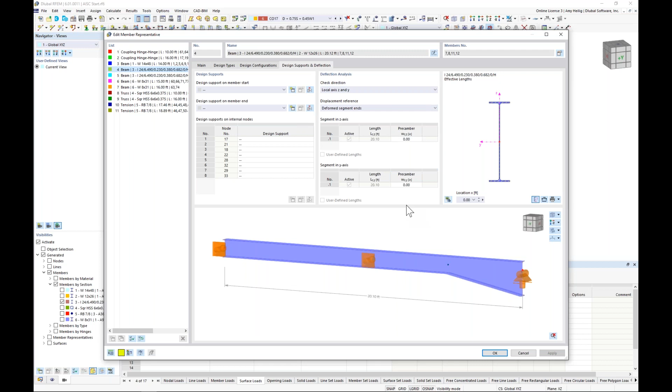Under the fourth tab, the program automatically assumes that all elements are simply supported. If we have a cantilever, we'd want to define a design support at the member start or the member end, and the program will refer back to the cantilever limiting deflection ratios instead. There are some additional settings for our deflection checks, but we'll leave everything as default for today.

Now that we've set those intermediate supports, under the project navigator we can expand out the types for steel design and turn on those intermediate supports, so everything we just defined is shown graphically here. Keep in mind this does not affect the analysis whatsoever - the analysis is not based on these intermediate supports, it's for design. For unbraced lengths and lateral torsional buckling, this is what those intermediate supports will affect.

The final thing to do now is jump to our table and choose steel design from our drop-down box. Under this first tab are our two design situations. Remember, LRFD is our factored load combinations where we reduce the stiffnesses and apply notional loads. Then we have ASD, which is our unfactored load combinations that we'd probably like to use for deflection checks, for example. The strength limit state type should be associated with LRFD, but my serviceability limit state design should be associated with my ASD load combination, so we make that change here.

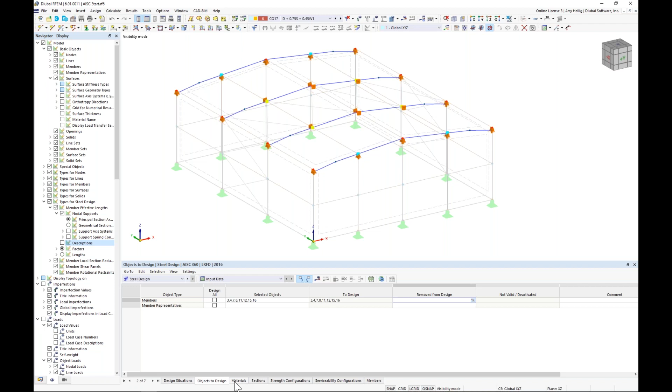Under objects to design, the program automatically assumes we'd like to design all objects. Let's turn this off - rather, I only want to design these 8 members that I have set the intermediate supports for. I click OK. The additional tables here are just a reiteration of our materials and cross sections that we have set, nothing further to do there.

So what I'll do here is clean up my display settings a little bit. I'll turn off these member effective lengths, and we'll run our calculation by going to calculate, calculate all. The program will run through all of our load combinations at once with the multi-core processor, as well as our steel design. You can see this solves within a matter of seconds.

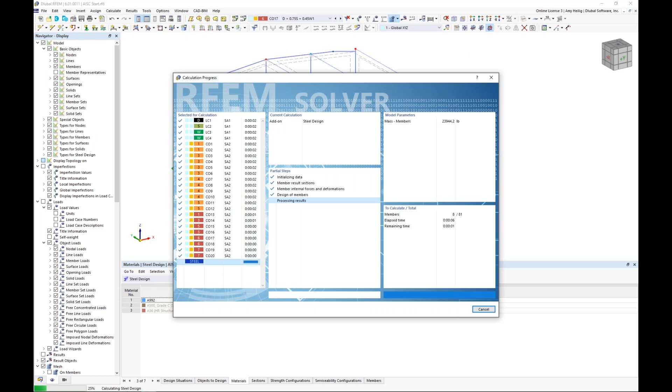Ultimately, we get an additional fourth tab within our project navigator for our results. Currently we are viewing the deformations of the structure, and we can see the deformations available to us within the static analysis. We can also make modifications to what we're seeing graphically - for example, changing the cross sections to colored and scrolling through these different load cases and combinations just to make sure everything looks as we would expect.

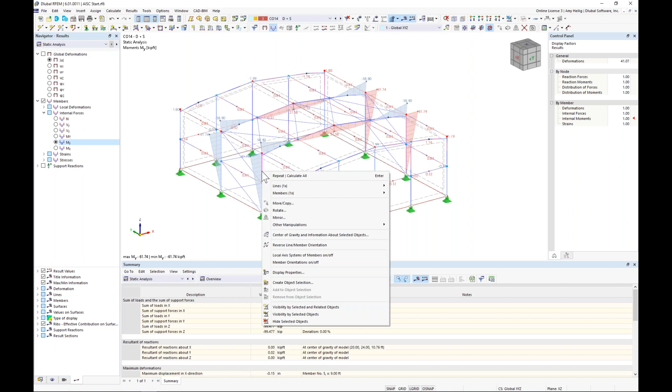In addition to deflections, we're probably very interested in the member internal forces. We can see axial forces, view shear forces, maybe bending moments in the strong and weak axis direction. Everything is shown graphically, but if we want more detail, we can right-click on a member, go to the members option, and turn on our results diagram, which lets us take a look at internal forces and deflections in more detail along the member length.

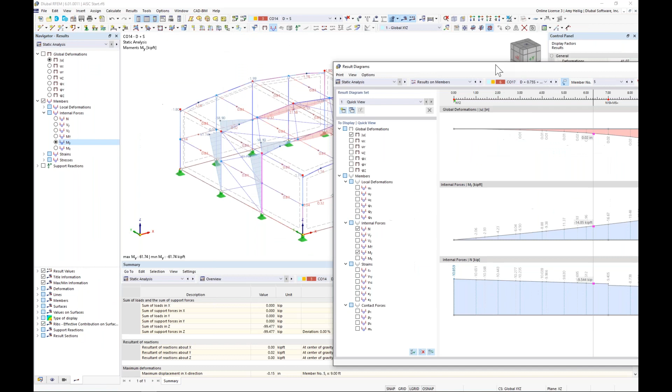I can take a look at different load combinations here and add these to my printout report. We also can work concurrently within RFEM in the background, so with any changes, if I rerun the calculation, this result diagram, maybe open on my other screen, will automatically update.

As far as the static analysis results, all this information is also available in table format. But we're also interested in the design utilizing the steel design add-on, which we can select under our drop-down box here, steel design. You'll see the table automatically updated to show my steel design, and I'm currently looking at the design ratios on the members - I choose this tab here, design ratios on members.

Within this table, I can click and notice everything is synced up in the background. That red arrow shows me exactly where my controlling internal force is, but I'm also looking at each one of the code checks according to all of the relevant chapters within the AISC - chapter E, F, G, H, and L for serviceability here.

Now, if I'm really only interested in the controlling design ratio, I can just use the filter options up here to choose max instead, so now I'm only viewing the max controlling check for each member.

For each one of these checks, it's important to know that we can always go up to our design check details. This is going to show me all of my code equations, my variables, the code references, and exactly how the cross-section was classified in much more detail.

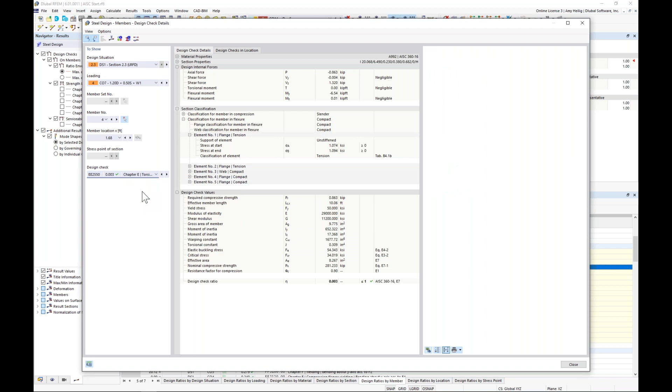We can even use this drop-down box to choose any one of the other design checks, and we can add this information to our printout report. So we're trying to be as transparent as possible, even more than in RFEM 5, exactly where all numbers are coming from.

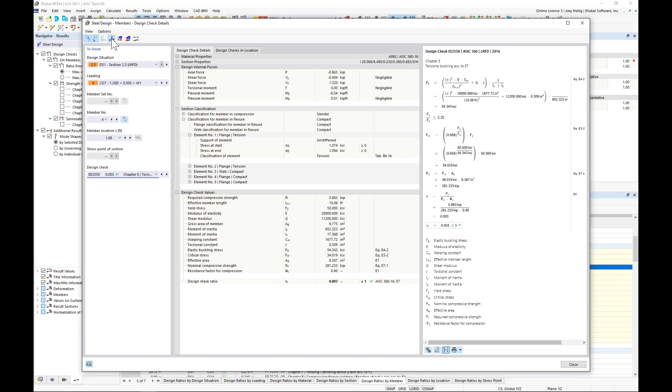Additionally, we have the table format here for all of our output, but we also have the graphical view. Notice that within this drop-down box, we're showing the steel design and currently showing the max ratio for all of the design checks, but we can turn this off and view chapter E, for example, or chapter F. So all this is possible here.

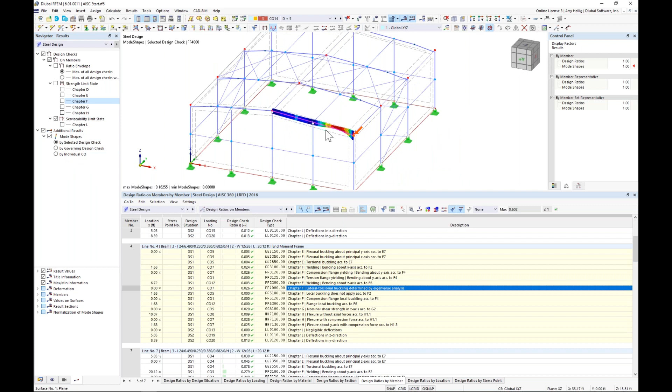You'll also notice that for lateral torsional buckling, we have additional options here for mode shapes. Remember, I chose the option to calculate an eigenvalue analysis, so this is the actual mode shape, the anticipated buckling mode shape for this member element, and how my critical buckling mode was calculated. It's kind of nice to see that visually for each one of these members.

Hopefully that was a good introduction in order to do steel member design according to the AISC within our new program, RFEM 6.